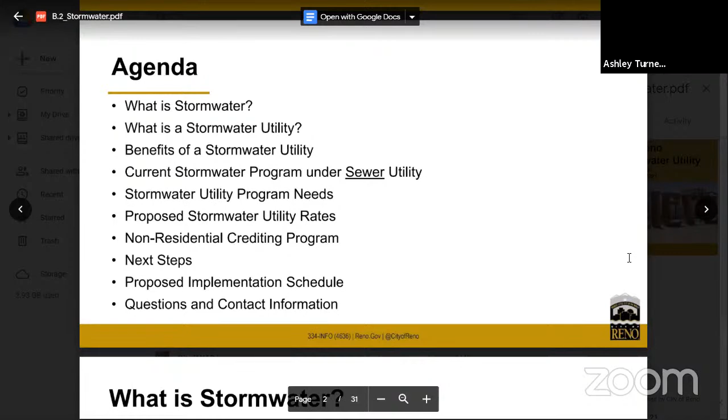Next slide. Our agenda today will be to discuss what is stormwater, what's the stormwater utility, the benefits of the stormwater utility, how our current stormwater program is funded under the existing sewer utility, our stormwater utility program needs, proposed stormwater utility rates, the non-residential crediting program, our next steps, our proposed implementation schedule, and then questions and contact information, so you know exactly where you can obtain more information and/or provide input. Next slide, thank you.

Before we get into what is stormwater, I want to make sure everyone understands we have four types of water in our community. The first is domestic water that comes into your house. From that, you have wastewater that leaves your house and goes to the wastewater treatment plant. There's a distribution system for water that goes in, and a system for wastewater that goes out. We then have a reclaimed or effluent water system, which comes out of the treatment plant and irrigates things like golf courses and parks. And then we have a stormwater system. My point is that these are all different systems.

The stormwater system is basically rain or snow melt that does not soak into the ground. In urban areas, it flows overland on rooftops, driveways, streets, parking lots, and construction sites, where it flows untreated into the system of pipes, ditches, streams and rivers. So every single property in the city contributes. Oh, I thought you had a question. Would you prefer that I wait? Let's wait till she finishes her presentation. Okay. Every single property in the city contributes to the stormwater system.

And as stormwater flows over these hard surfaces, it collects trash, sediment, chemicals like motor oil, fertilizer that can pollute our local waterways, such as the Truckee River. A properly functioning stormwater drainage system and pretreatment system can reduce flooding and keeps our Truckee River and other natural systems and waterways healthy. Next slide, please.

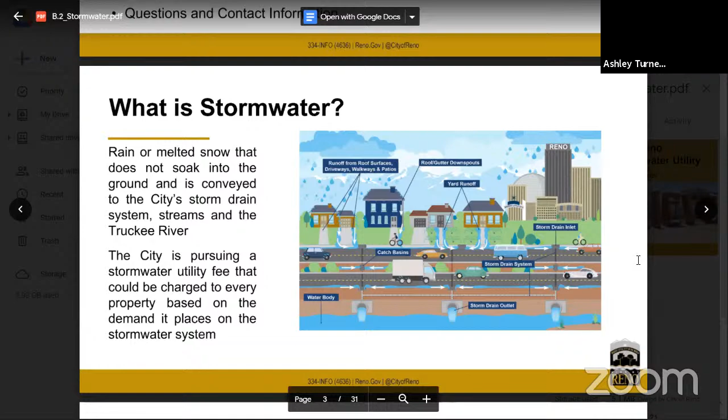So what is a stormwater utility? The city of Reno is proposing to create a new stormwater utility, which, if adopted by our city council, would collect a new fee from customers dedicated to improving drainage and water quality, reducing flooding throughout the city. The stormwater utility fee would provide a dedicated source of funding committed exclusively to maintaining and improving these systems.

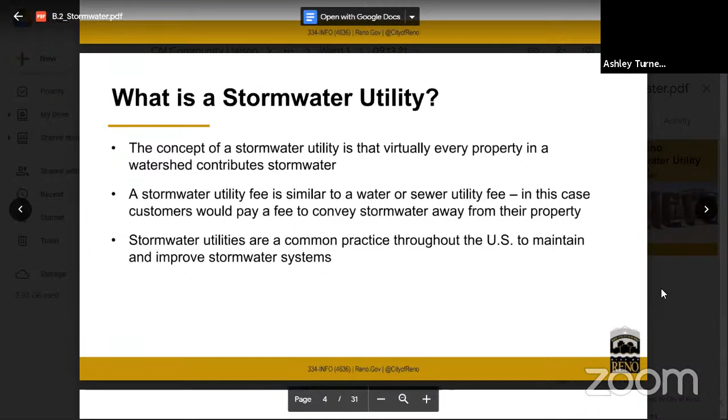Virtually every property in a watershed contributes to the city stormwater conveyance system. And so this proposed stormwater fee is based on the demand or amount of impervious surfaces that each property places on the stormwater system. Stormwater fees are common throughout the United States. There's about 1,600 of them across the United States, and they exist in several municipalities in Nevada, such as Carson City, the city of Sparks, portions of Washoe County, and in southern Nevada.

So the benefits of a stormwater utility: it would provide a dedicated funding source for engineering analyses and construction for the recurrent and new problem areas, the cleaning and maintenance of storm drains and culverts, rehabilitation of aging infrastructure, addressing the increased frequency and intensity of storms, and compliance with state and federal environmental regulations. I want to point out that the stormwater utility would not provide improvements for new development. Those are all incumbent upon the new development. Okay, so next slide, please.

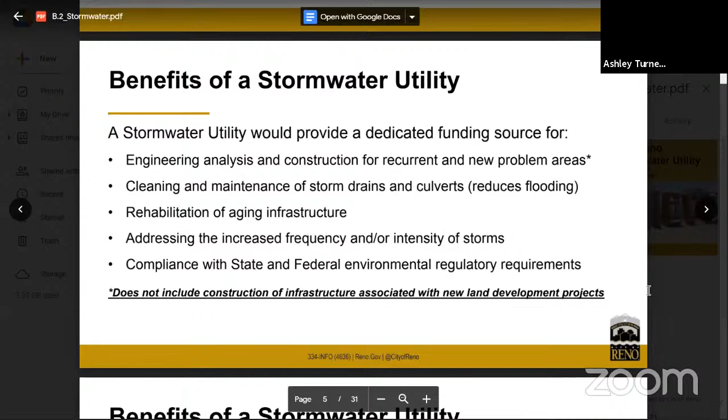Some examples of areas where we have improvements that we need to fix, benefits of what you would get out of the stormwater utility. I'm just going to show some flooding events that we've had in a number of places around town. This is at the intersection of Aquila and Thomas Jefferson. So this is in this ward. It's flooded here multiple times. This happens to be the 2017 event.

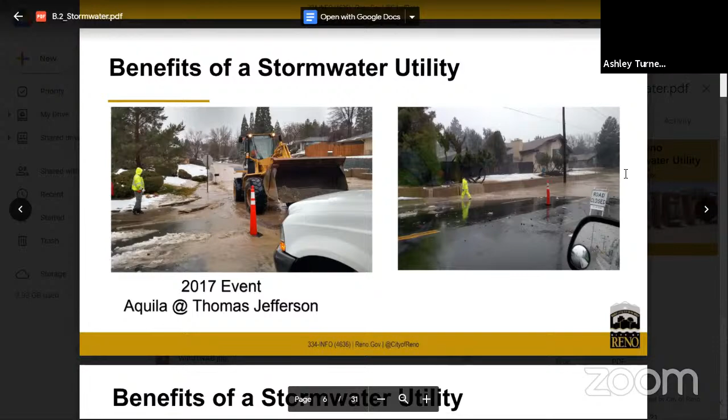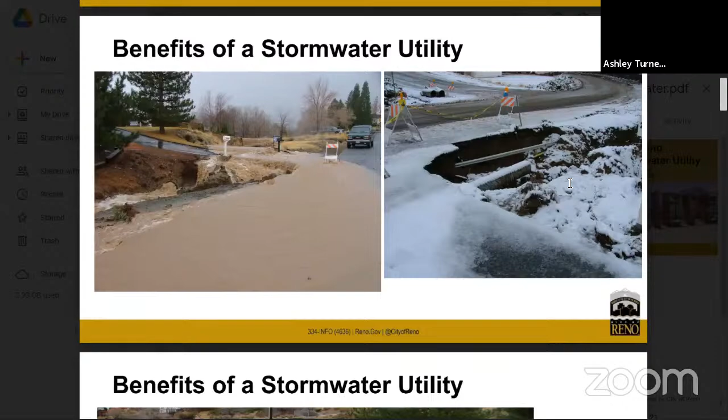Next slide, please. This is another, actually, that's Sagittarius. Yeah, sorry, that's Sagittarius, just north of Aquila, west of Aquila, apologize. Okay, next. You can see the perspective, that's also Sagittarius. Really fast flowing water, dangerous situation.

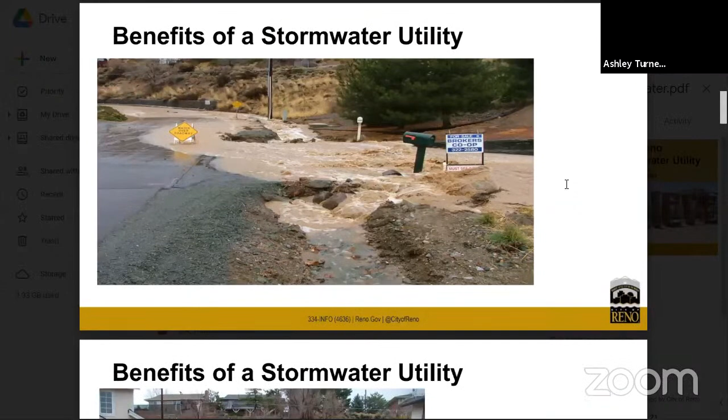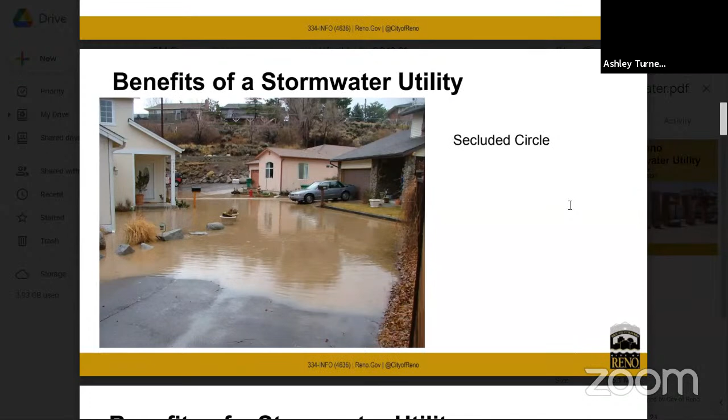Next slide, please. This is Secluded Circle just west of that street. I'm trying to remember. It's in the old Southwest. It's another localized flooding area off of Workman. It's off, not Daniel. Anyway, Hunter Lake area. So I can't remember the exact street. I apologize. Charles and Hunter Lake area.

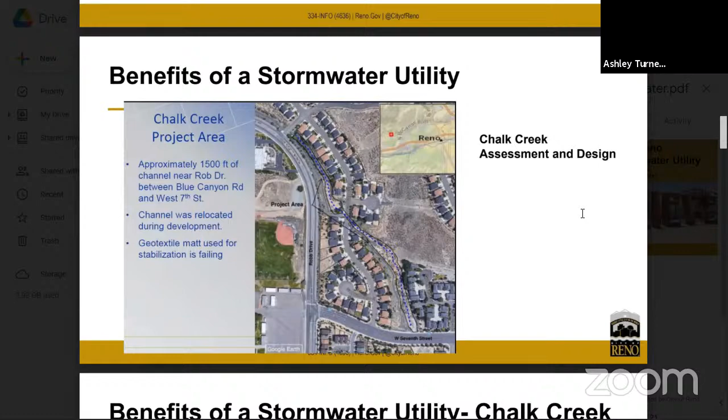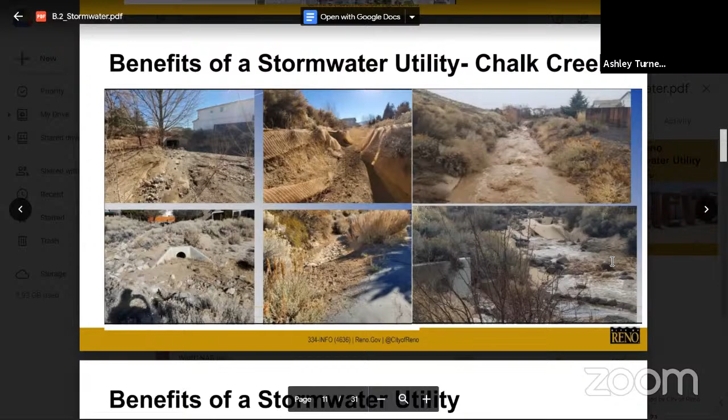This next project is in the Northwest. This is the Chalk Creek Assessment and Design. This is an existing channel that was designed as part of a development. It had structural controls in place to keep that channel in place. Those have since failed, sending a bunch of sediment downstream. The next slide shows some pictures of that channel and the failed improvements that then degrade the channel and send that sediment down. It gets all the way down to the Truckee River and impacts our waterways.

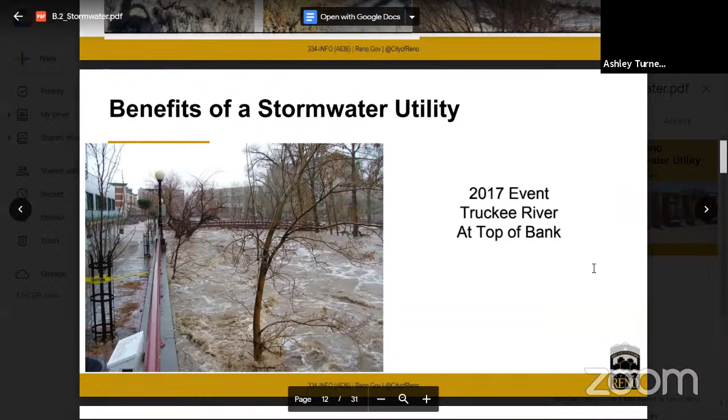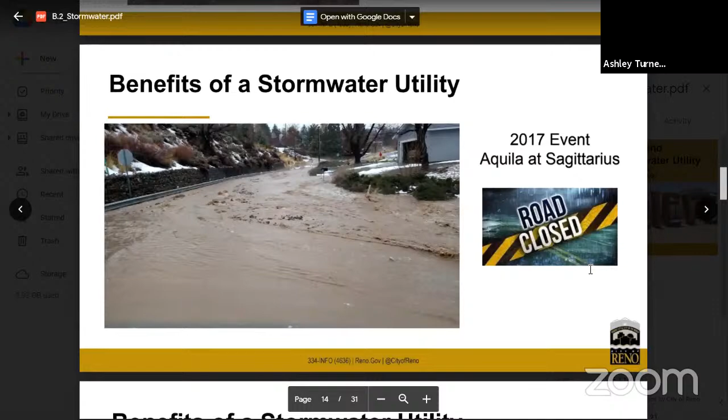I think we have Aquila and Sagittarius again here too. This one really shows how fast that water is moving in dangerous situations. Here's McCarran Boulevard here. I apologize. Swan Lake at Lemmon Drive, that shows the HESCO barriers that hold back Swan Lake to protect some of those homes out there for that long duration flooding.

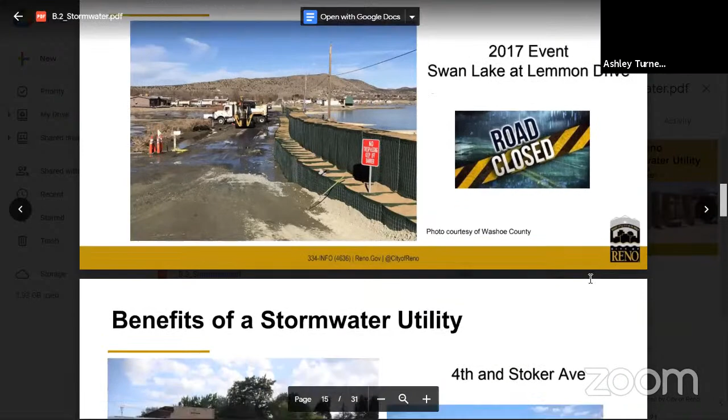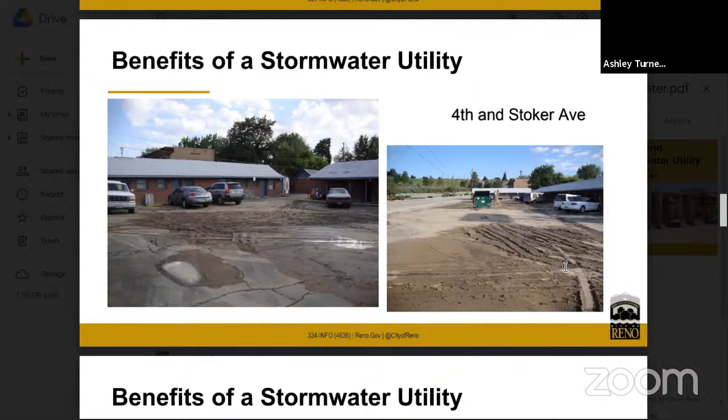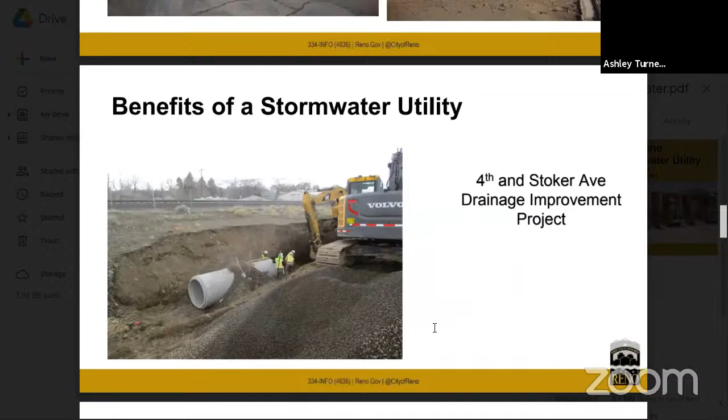Next we have Fourth and Stoker. Again, this is showing post-flood event and it just shows debris cleanup, but a lot of this area was underwater and inundated. So the next two slides show our Fourth and Stoker drainage improvement project. So here we installed a 48-inch culvert that then conveys all that flow away so it doesn't inundate that area. That was completed in 2019. It was about a $6 million project, to give you an idea. It's another photo of the Fourth and Stoker drainage improvement project.

So next we'll talk about the city's current stormwater program. Currently the stormwater program is funded through your sewer bill. About $3.50 of your monthly bill, and your bills are quarterly, but we're going to talk about monthly costs. So $3.50 of your sewer bill goes to pay for our stormwater program. That currently funds about $5.25 million a year, or a total of about $105 million for 20 years. And we'll come back to that amount in just a moment.

Our program needs are $440 million over 20 years. And as you recall from this measure, for a total of $105 million over 20 years. So you can see that we're significantly underfunded for what we need to accomplish. And those projects will never be accomplished.

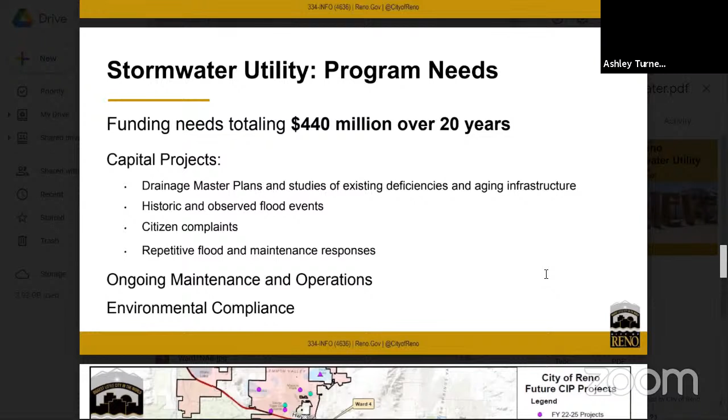This next map identifies many of those projects, all of the projects in our capital improvement program. That's a CIP. And this just really illustrates that these projects are located

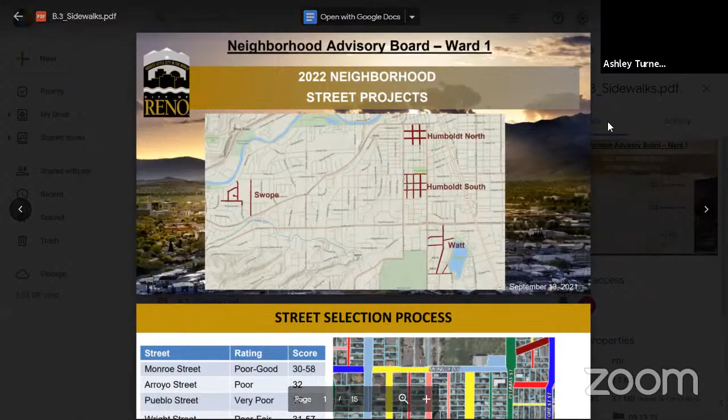My glasses are foggy. Strong. If it's okay, I'm gonna stand up. I think I feel a little bit more comfortable, if that's all right.

My name is John Simpson. I'm a senior civil engineer with Public Works in the Capital Projects Division. The agenda item says possible action. I think today we're going to give you more updates, but we're definitely here to hear your feedback today. The City of Reno has about 730 miles of road that we take care of. About 28% of that is maintained by RTC.

Those are our larger roadways, which is collectors, arterials. The remaining 520 miles of road is considered our residential streets. That's something that our city takes care of through our street fund. Each year, we rotate through 3 different areas.

We do southwest, northwest, and then the northeast and southeast. And we kind of rotate through those 3 areas each year to make sure that we are equally taking care of roads throughout the city. We are in the southwest area, so that means that Ward 1 gets to see some roadway improvements.

I say this year, because we're working on the projects right now, but the 2022 projects are scheduled for next year. We have 4 of them. We have one, what we call the Swope Project, Humboldt North, Humboldt South, and the Watt neighborhood. 3 of those are in Ward 1. Swope, Humboldt North, and South are all in Ward 1.

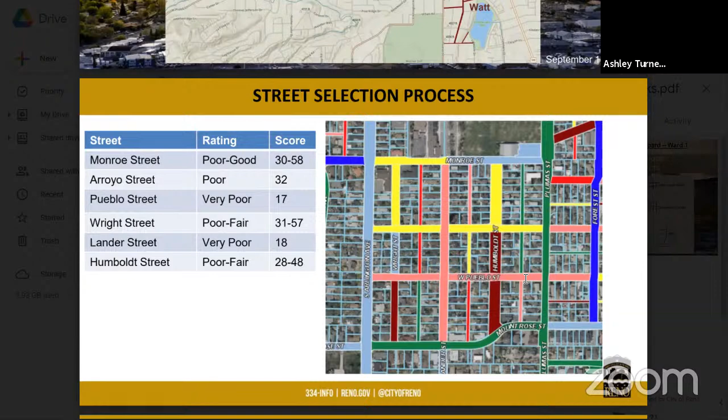As you can see, this is just an example of the Humboldt South neighborhood. You can see some of the scoring that we have in there are all the way down to 17, 18, 30. They're pretty low. And if you jump to the next couple of slides, you can see what we call alligatoring, I can't say it now. Well, you know what I'm talking about. But you can see the pavement that is failing.

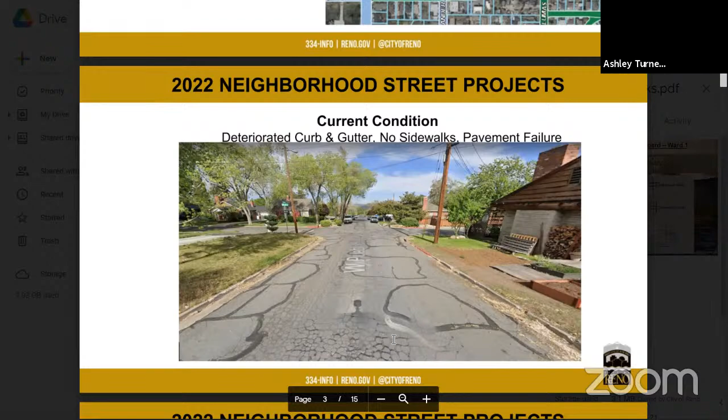Shortly you start seeing potholes popping out and other things happening. You can see the curb and gutter in poor condition. These are areas that we want to take care of and do improvements to the neighborhood.

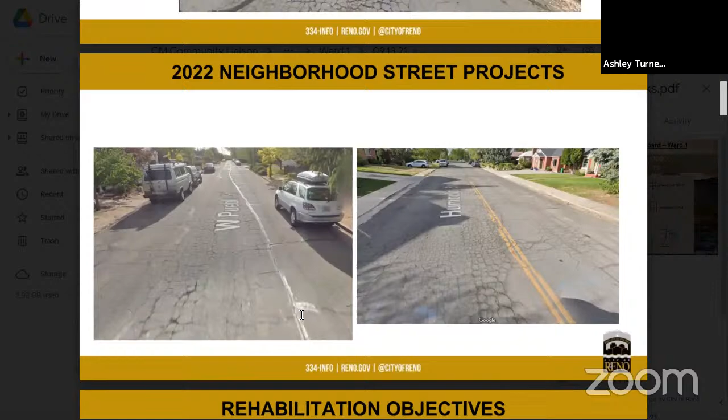So what are our goals? What do we want to do when we're doing our street projects? Obviously, we're going to improve the streets. We're going to improve the sidewalks and the curb and gutter. That's just kind of straightforward. But some of the other things that we're going to be looking at, we look at our city infrastructure, our storm drain, and our sewer system. Do we have areas in the neighborhood that pond and cause drainage issues? Or do we have conditions of our sewer system that need to be repaired?

We look at safety, whether that's pedestrian safety or through signage and striping to improve the neighborhood. Sometimes we're looking at traffic calming to help the neighborhood. So we look at safety, and obviously our goal is that the streets are great.

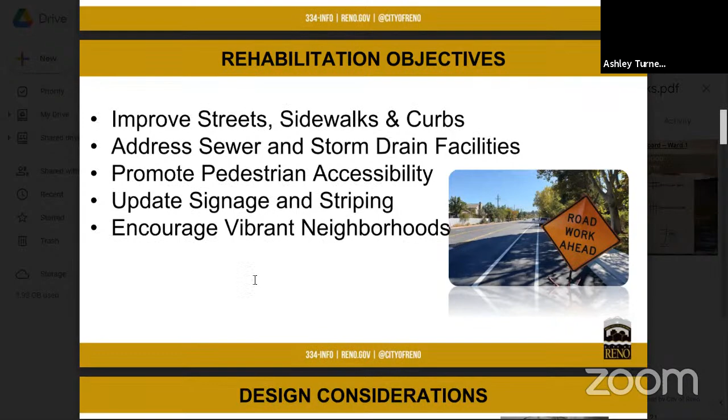When we start our projects, we're gathering a ton of information. We go to our public service requests that we get from people calling in and saying, hey, we have this issue with the crosswalk, or we have this over here, and we gather up all that information. We look at crash data and pedestrian incidents so that we know what's going on in the neighborhood. Do we need to install some other safety measures to make it safer for the community?

We'll look at the condition of the infrastructure. Obviously there's some more technical issues where we're looking at the soil conditions and the geotechnical stuff that ultimately will determine our roadway section in order to create a road that has a long life.

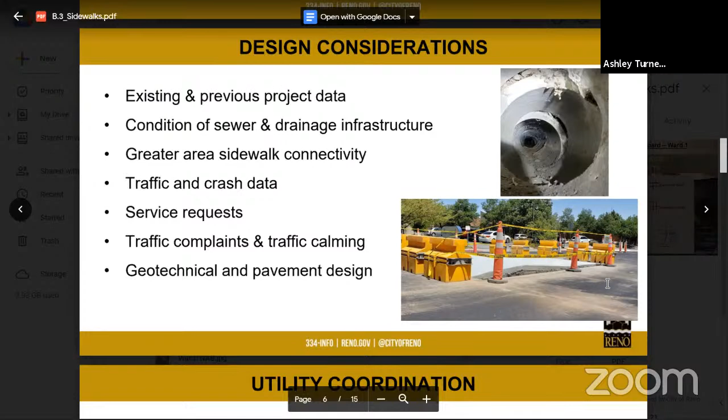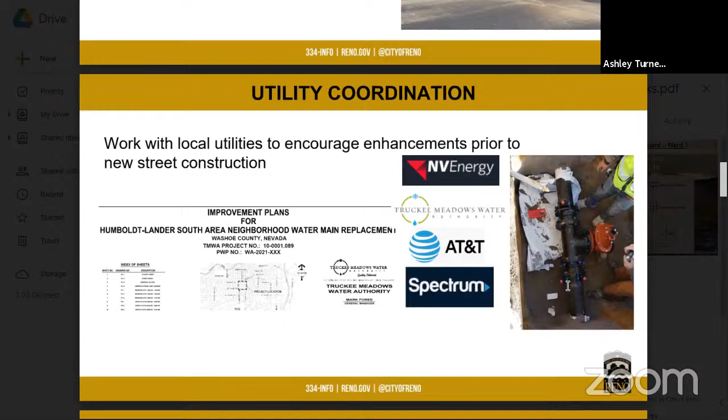We also reach out to the property owners. So we sent the property owners all letters a number of months ago, early this year, so that they knew that the project was coming through in their neighborhood. When you have a sewer lateral or a new water service or someone wants to bring a gas line into their house, now's the time to do it.

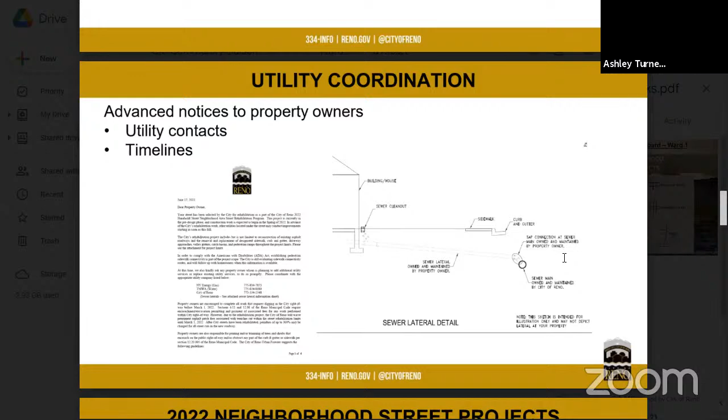We will eliminate the pavement fees that we normally charge individuals, so it's a little bit cheaper for them to come in there and take care of that work, and it preserves the road. It prevents people from cutting those things open. So we reach out to the neighbors also and let them know it's coming and encourage them to take care of some of that stuff.

I'm gonna jump in and give you a little bit more detail about some of the neighborhoods that we're working on. The Swope neighborhood. This neighborhood is near the middle school. We have reached out to Washoe County Schools and we're working with them. So a unique aspect of this is we're installing 5-foot sidewalk in front of the schools to give them a little bit larger, wider sidewalk in front of the school there. We're also working with them to install a crosswalk right in front of the school with some flashing beacons so that the kids are a little bit safer to walk across the road.

Most of this entire neighborhood already has 4-foot sidewalks in there. We will be looking at the condition of the sidewalks and the curb and gutter to do improvements to those things. We have a number of pedestrian ramps. We're going to actually fix about 38 of them in that neighborhood. This roadway has about 1.1 miles of roadway that gets repaired and fixed.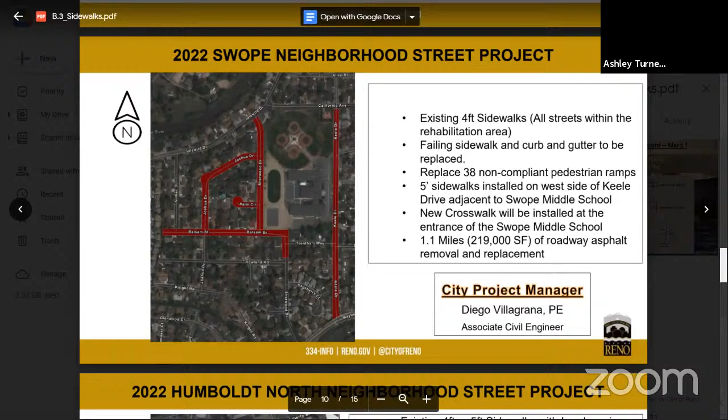Humboldt North. This one also is about 1.2 miles, so it's similar in the amount of road that we're fixing and replacing. This project area has sidewalk throughout the whole entire area; it's either 4 feet or 5 feet. So sidewalk exists in this neighborhood. There was a project, I think in 2009, that came in and did a lot of improvements with the sidewalk in this neighborhood, so a lot of that's in good condition. However, the pedestrian ramps are outdated, so those are repaired.

The keynote for this neighborhood is we've evaluated the sewer system in this neighborhood, and there's some repairs and some work that has to go on with the sewer system in this area. So before our street unit comes in, you'll see construction crews coming in and doing some big work in the neighborhood. A lot of that's kind of in the alleyways, so we'll be fixing a lot of those.

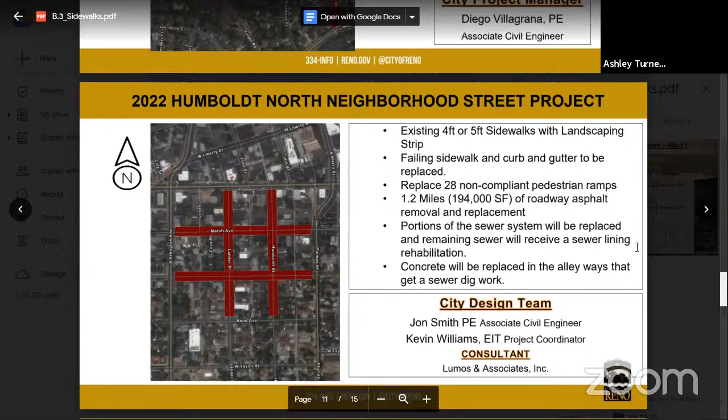And the last area that's in Ward 1 is Humboldt South. This is one of our most challenging neighborhoods that we have. Part of that reason is we have sidewalk on Humboldt and Lander. However, Wright, Pueblo, and Arroyo have no sidewalk or minimal sidewalk in those areas. So providing a safe pedestrian route has been challenging for us. And so this project we've been working diligently on, formulating plans of what we can do to best serve the neighborhood in this area. And it's been a challenge.

Another item is TMWA's infrastructure in this area has been determined pretty old. So not only will you see sewer work in this area, but TMWA will also be in here before the city comes and does their work. So you're going to see TMWA, the city sewer system, and the street unit kind of impact this neighborhood all at once. So there's a little bit more impact on some of these projects, but in the end, when we're all said and done, you're going to have a great neighborhood and little to worry about. Because of some of the challenges that we have with this neighborhood, we're looking to meet with the property owners. And so please slide to the next slide.

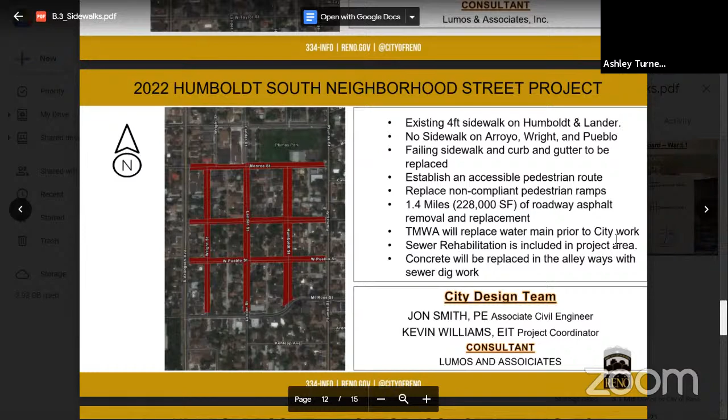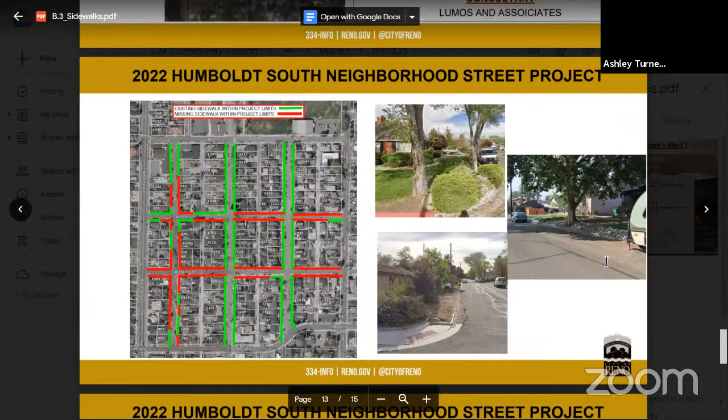As you can see, we have some areas, if you look at the pictures on the side, there's some areas that just lend themselves to kind of having that work well. And in other areas, we have mature trees, elevation differences, some really challenging issues that we're going to have to solve with this project. And so, as you can see, the highlighted areas in red are the areas where sidewalk does not exist. So we don't really have a really good safe pedestrian route for a lot of individuals in this neighborhood. And that's something that we want to take care of.

We plan to meet with the property owners on this project. The date that's on there, it says October 5th. I apologize, that was done a little early. That's why it says tentative. That meeting has been scheduled for October 6th at the Plumas Gym. We're gonna meet with individuals there. We're sending out notices to all the property owners that are in that neighborhood, and we're looking for feedback from them.

We want to hear their concerns and hear their preferences and some of the stuff that's going to directly impact right in front of them. And so we're going to reach out to them and hopefully get some good direction on some of those things. We have a plan in place. We want to share that plan with them at this meeting and get input and feedback from them.

Again, my name is John Simpson. I'm with Public Works and Capital Projects. Today, John Smith's here with us. Diego couldn't make it. He is actually coaching the soccer team right now, so he couldn't make it here with us today. But John Smith is working with the Humboldt Street Project. You have his contact information up there. Please feel free to contact him directly if you'd like to, or you can reach out to myself. Diego's up there for the Swope neighborhood. You can call him. Also, some cards.

Great, so it looks like I have some questions. Go ahead. Just curious, are the property owners responsible for any of the costs to do this? So the neighborhood street projects are funded through the street program. And so all the street repairs, sidewalk repairs, and those types of things are always paid through the city's funds that go through there, we rotate through the city.

Good evening, for the record, the traffic engineer, here to talk about the Ambassador Drive traffic calming. This is an overview of the neighborhood. Ambassador Drive is the major north-south route. We have trailers on the south end and rural on the north end. We also have legacy traffic calming on the north side. In evaluating the traffic calming, we're looking at this area right in the center, where the marker is, and there's a trail crossing and some open space in there.

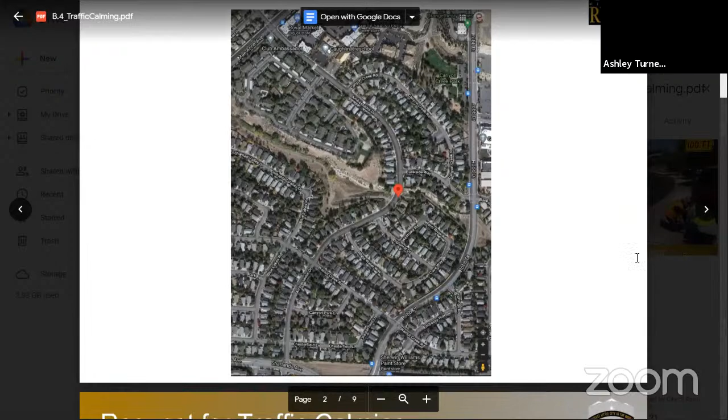Next slide. So the request for traffic calming: in 2020, the road was reconstructed. During the reconstruction process, there were concerns that the new pavement surface would increase speeds. So after that neighborhood was reconstructed, we performed a traffic study. Over a 9-day period of collecting data, we found that the 85th percentile of free flow traffic is 33.5 miles an hour, meaning 85% of motorists are traveling at or below 33.5 miles an hour. The average speed would be the 50th percentile. The City of Reno currently has a policy for traffic calming, and that threshold is 32 miles an hour. As you notice, we're just slightly above the threshold. What is the speed limit? 25 miles an hour.

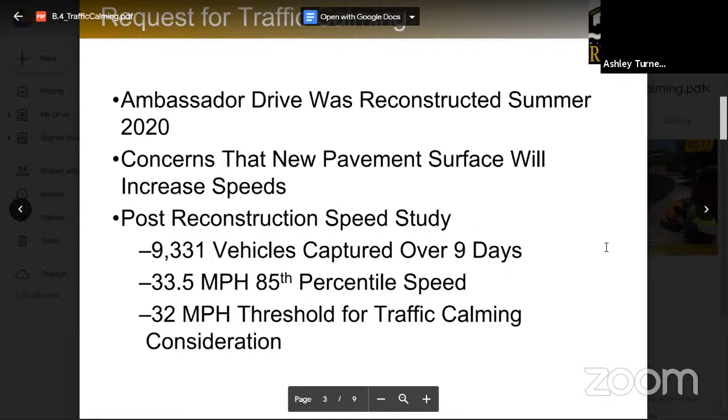Next one. So as far as design considerations, this Ambassador Drive is actually a primary emergency vehicle route. Having that designation, the fire department has to review everything that goes on that roadway because since it is a primary emergency vehicle route, they're concerned about response times.

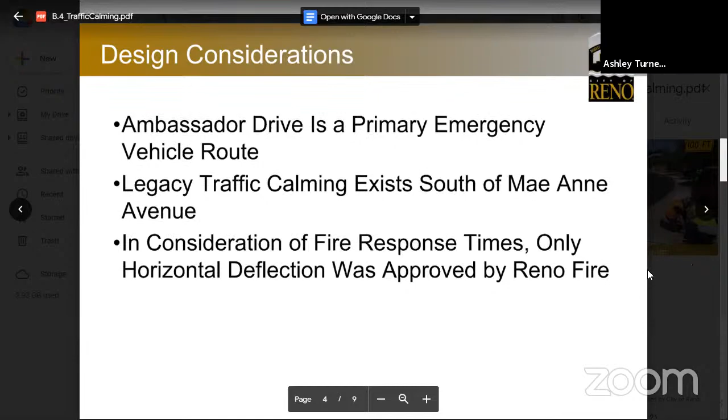However, this particular street is unique in the sense that legacy traffic calming already exists on the north portion with the speed humps. So working with Reno Fire, in consideration of fire response times, Reno Fire was permitting essentially horizontal deflection, or anything that would move traffic horizontally versus vertically like a speed hump, which also tends to damage Reno Fire's equipment.

Next slide. So that having been said, we're looking at different design considerations for that open space portion where that trail crossing is. And so we came up with an angled slow point design. So you can see here, it actually deflects traffic horizontally. And so the design speed for that is about 20 miles an hour.

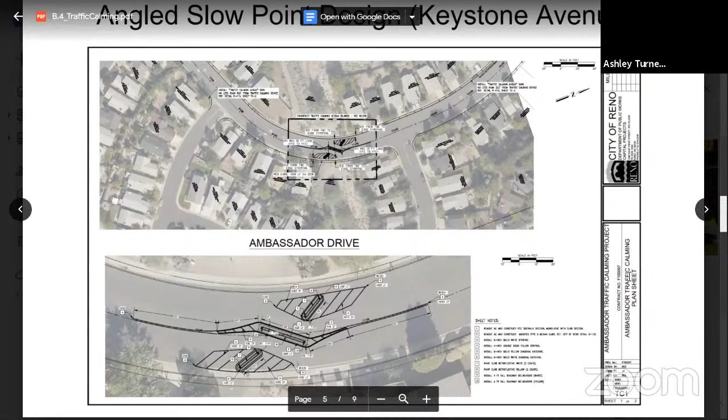I also made a comment that it's very similar to Keystone Avenue. So those who are familiar with Keystone Avenue on the north side, there's, I want to say, about 3 of those slow points. Gosh, we probably designed this about 20 years ago. And for those who actually went through them, they're quite aggressive, actually. So, next slide.

So in consideration of the slow point, we actually did a mock-up at our city yards using cones with the exact dimensions. And then we actually ran city equipment through that design. You probably noticed in the picture, we had a snowplow there and also a fire truck. We also ran some street sweepers in there as well.

So the key was we wanted to make sure we had a design that Reno Fire was comfortable with, which they were in that case. Also with the snowplow, we were able to get the blade through the cones with no problem as well.

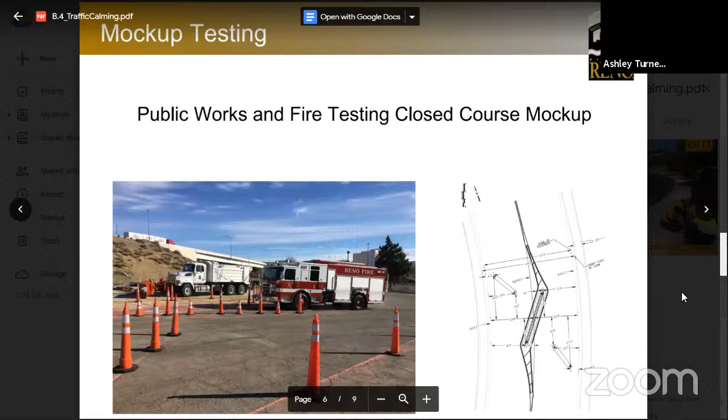Next slide. So when we actually got the design and then we got the speed study, we reached out to the neighborhood. So we targeted Ambassador Drive itself with the adjacent property owners along the streets in approach of Ambassador. And so we actually had mixed results there. Of the 61 notices sent, we only received 5 comments back, and those were mixed.

We had 2 in opposition of the traffic calming, 1 in support, and then 1 comment was a completely different treatment, completely outside of the project scope, and then just a request for clarification, which we provided.

Now, granted, when we put out the flyer, it was if you had concerns, please contact us. So it could be conceived that they didn't reach out to us, they didn't have any concerns, and we're good to go. But the primary reason I'd like to bring it before you is we did receive very mixed results. So this was essential for the NAB feedback on this particular project.

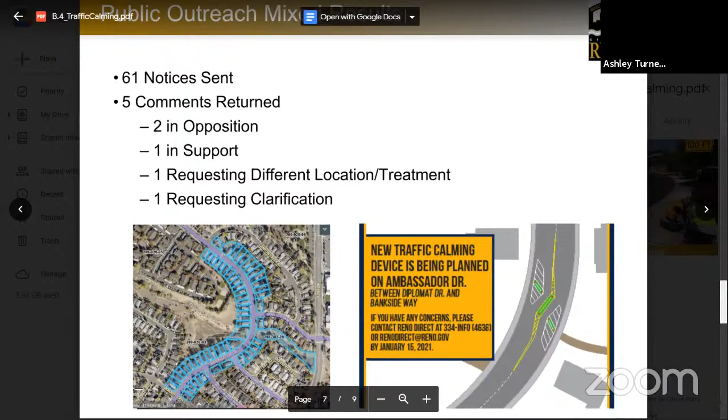Next slide. So the staff recommendation on this is to move forward with the placement of the slow points, primarily because the 85th percentile speed was measured at 33.5, which again does exceed the threshold for the city policy on traffic calming. So in this case, it is appropriate. Staff did put quite a bit of work into the design and the testing of it, and we don't anticipate any conflict with response time. Next slide. And with that, I'm just going to invite any questions and feedback.

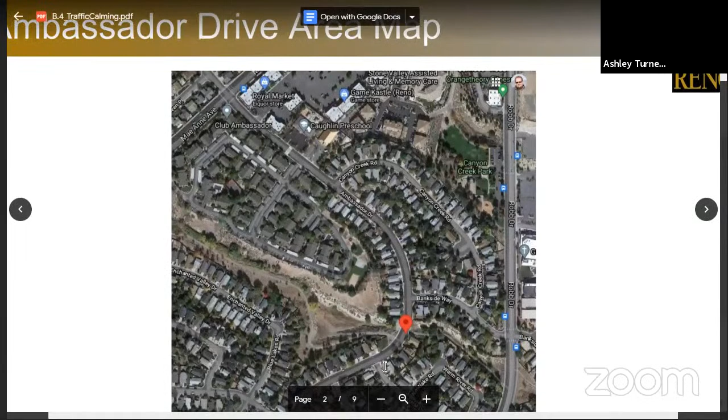Can you go back to page 2, the map, please? Okay. Move it up a little bit, no, up. I want Charlotte's Avenue on there. There's Charlotte's Avenue. Yeah, there's Charlotte's.

And what we have found, those of us who live on Charlotte's, is that people are using Ambassador as a shortcut to get onto Charlotte's, to get onto exit 9 to go on Interstate 80. Are you finding more than one calming effect? So this particular project, we're just looking at the slow points. And then we have the additional speed humps on the other side.

If we just discourage people from commuting on Ambassador Drive by installing those calming things, then that makes it safer for people making a left-hand turn onto Charlotte's to get onto Robb to Interstate 80. That would help. Yeah, and to be completely honest with you, we were looking at through traffic on that

as well. There was some thought of making possibly Charlotte's a right in, right out. That was something that we vetted through the fire department, again, it being the primary emergency vehicle route. It was something that they were really discouraging.

The other concern that we had is if we actually put some treatments here to eliminate the cut-through traffic, as you mentioned, there was a good possibility that the new cut-through traffic route would have been from Mae Anne to Ambassador to Canyon Creek back over to Robb. The consideration there is now we're placing vehicles in a school crossing zone versus Charlotte's. So yeah, it was something that we definitely considered.

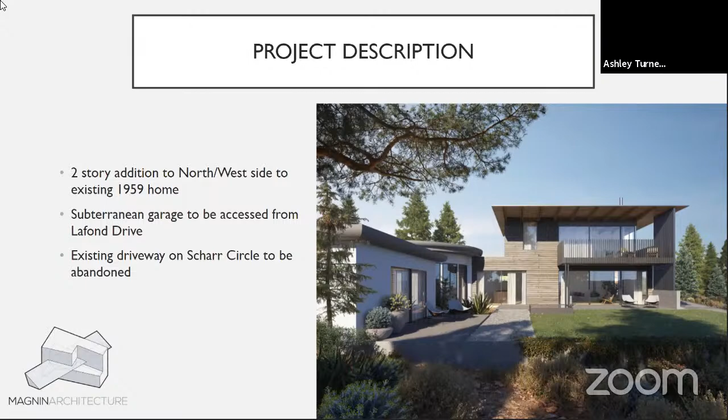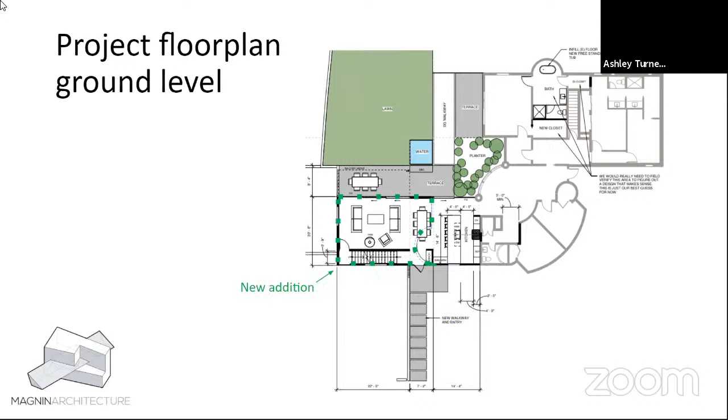These are just renderings of the project, so this is looking from the backyard to the front. The project is very simple. It's a very small existing home that we're going to do a 2-story addition on. So you're seeing living, dining, kitchen below and a master suite above, and then we're doing a subterranean garage that's accessed from Lafond Drive. On these floor plans, we have a note that's not showing up where the added area is. Yeah, if you press the button again, it shows up. Cool. Yeah, so this is the added area. Second floor addition.

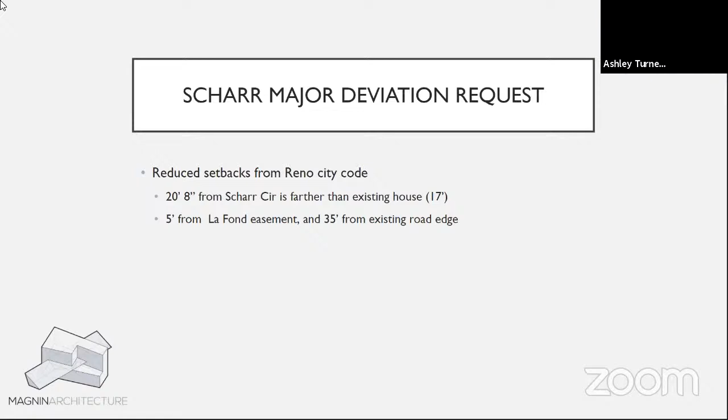And so these are the formal requests that we're asking for. 20'8" from Scharr Circle. We were grandfathered at 17 where the existing building front is on that side. And then 5 foot from La Fond, which is actually 35 feet from the existing road edge, which cannot be improved in the future.

And we did go through a lot of studies on this. This property is very constrained. It has a septic system on it, septic tank and leach field. There's also a utility easement on the south side of the property. So the red area that you see is impossible for us to improve. So we're pretty limited to where we can do this addition. The white part of the plan is where the existing house is, the gray part is the addition we're talking about.

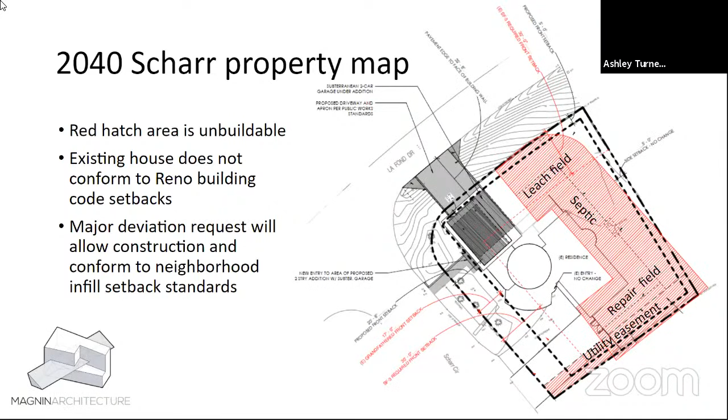So essentially, the property is very constrained. The existing septic system is a very hard thing to work around. We go to the health department, they have setbacks from repair areas, tanks, leach fields, all of that, which makes it impossible to develop in any area there. And as part of our major deviation, essentially what we're doing is what was used in the previous findings back in 2014, and we're illustrating that none of the properties in this neighborhood are meeting setbacks by current standards. So we've created some exhibits.

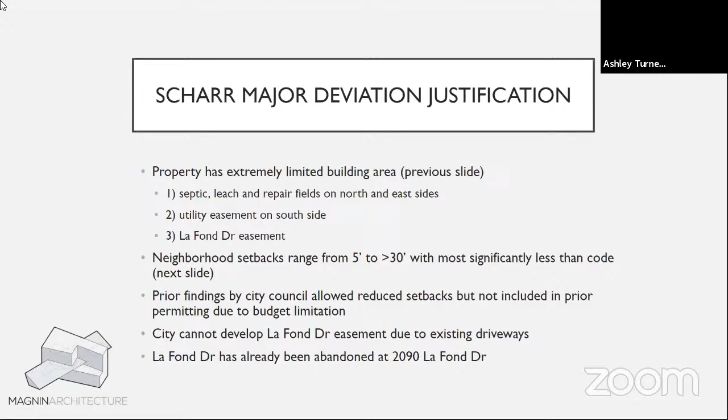We can just go to the next couple slides, I think. Down La Fond Drive, setbacks vary from 4 feet to, I think there's one that's 30 feet, which is the current zoning code front yard setback. But they're all non-conforming. And so pretty much what we're asking for with this major deviation is that we can also do our development with non-conforming setbacks.

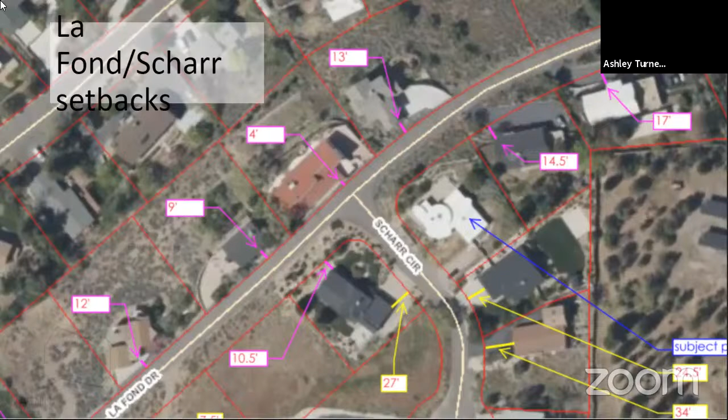How many neighbors have been contacted? Yeah, so I talked to one of them actually. You see the card. My home is where it says 14.5, which is to the east of their home, and that's absolutely right. My home was built in 1965, and half of my front yard improvements were sitting in the right of way. And the city map shows La Fond twice as wide as it needs to be. Well, it doesn't really make any sense. For the record, can you say your name, please? Grandfathered in.

So we haven't talked about the immediate. But we have to approve this? So with the Planning Commission, right? Planning Commission, correct. So this isn't marked as an action item. No, this is just for discussion. So you can fill out the comment cards down there and they'll get turned in.

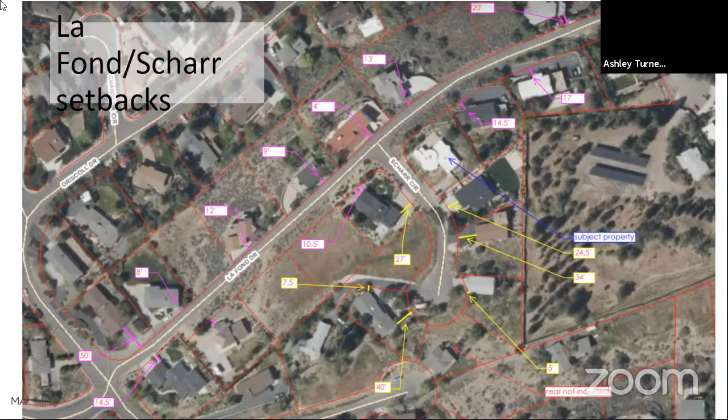Have you been to the planning commission already? No, you're preparing to go. We are, our meeting is October 20th. So is this more of your presentation? There's a couple more slides, I'll go through it quickly, but it just shows the nature of other development in the area. They're built right up to the road edge in specific cases. Yeah.

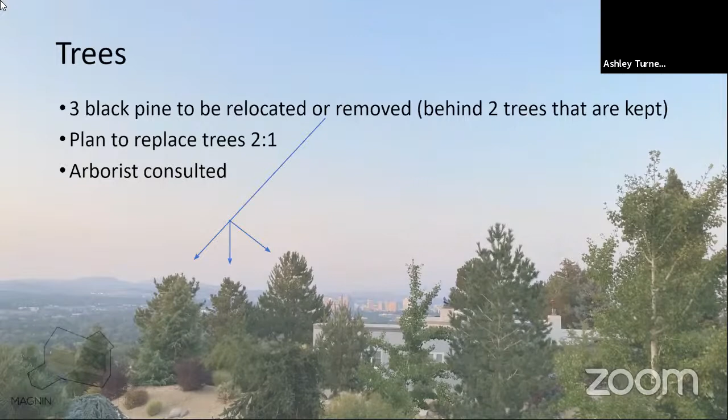We have some memos from the planning department with their concerns, so we're already starting to address some of these items. We have to remove the 3 pines on the north side of the home with the addition. We're going to have the arborists take a look at those, to see if we can replant them on site as well, but the homeowners already planted. Next slide, it's the number of trees. Planted 20 trees.

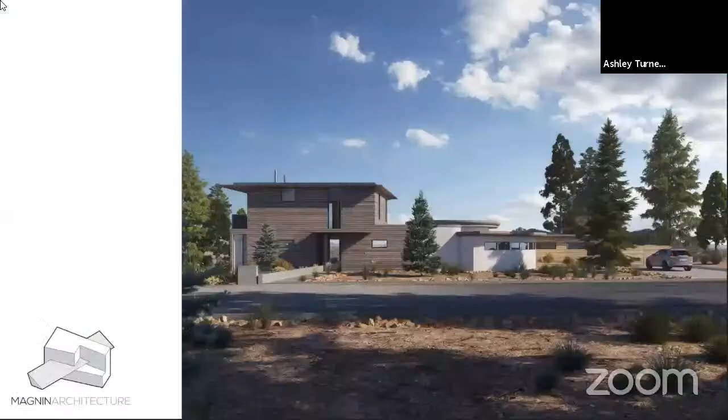Jerry has a question. Is it typical, when tree removal is involved on a site, to require 2-for-1 replacement? No, it's not by code, but we're just trying to present this project in good light to the planning department. I also mentioned the view issue. If we put up more trees, it potentially blocks other people's views, so it's a balance. More than 2-to-1 was actually suggested, but the more trees we put in, the more impact on the view, so we're trying to balance. Okay.

And I would just say, in closing, I feel like what we're presenting is not atypical for the neighborhood. It fits in the fabric of the existing neighborhood in a way that is going to improve home values around and really just be a nice addition to the neighborhood.

Are the cards down there? It's all virtual. If anyone needs the laptop, I'll hand it over after the meeting so you can write in your comments. That way they're all in one place. You provided the link for that. Yep, it's also in the email that I sent you. I have cards if anybody wants to email.

When I first started, I couldn't figure out what you were doing. It's pretty simple. It's essentially just the wood box from the existing residence, white CMU block, and then one side of it. Any other board questions? Well, thank you for your time and good luck. Can I ask a question in person? Just state your name. When did you buy the house? January. Okay. Any other questions? All right, thank you. Thanks very much for your time.